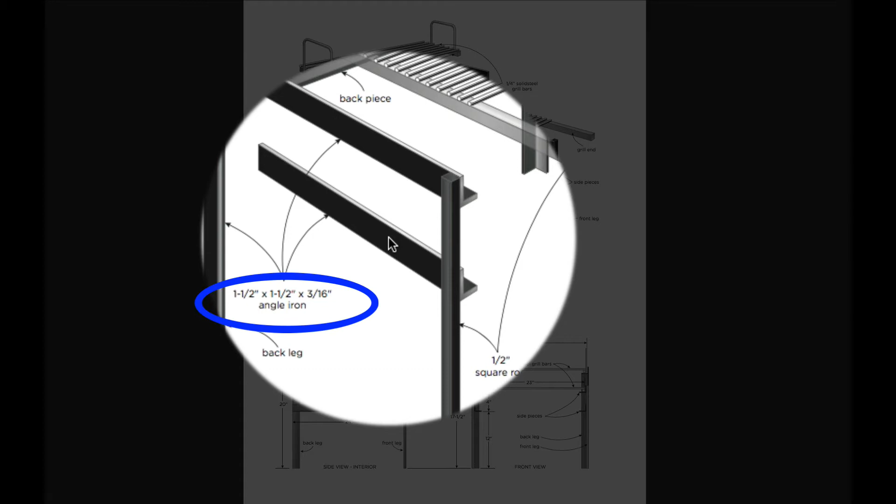details on the plans. Your construction work will go better if you print out the plans and keep them handy in your shop for reference. And looking at them now, you can see that the majority of the support structure is made by 1.5 inch by 1.5 inch by 3/16 angle iron. That 3/16 business refers to the thickness of the two sides that come together. So it's fairly thick angle iron.

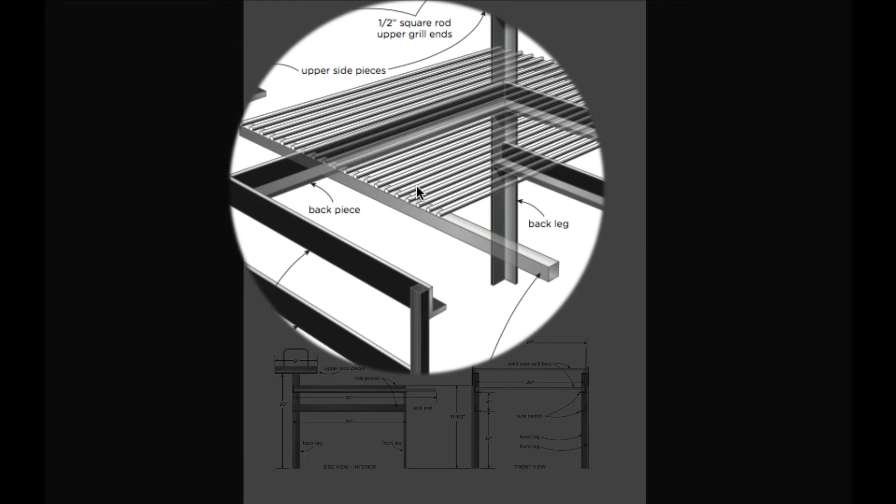The front legs, 1/2 inch square solid rod. That's the same thing that's used for the grill end components, the components that hold together the 1/4 inch diameter solid steel rods that form the actual grill surface. Up here, we've got the same material used to make the handles for lifting the warming rack off. 1/4 inch is small enough that you can bend that around something without heating it necessarily. It's not a big deal to bend that kind of steel before you weld it on to these upper grill ends.

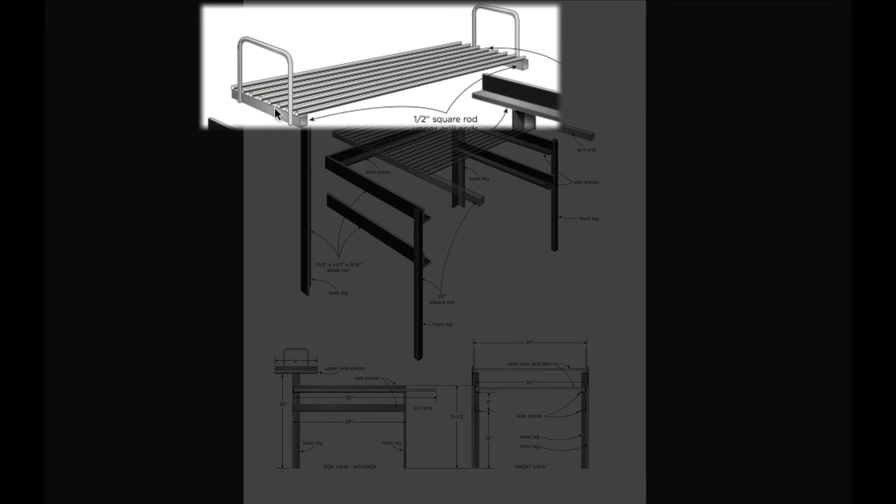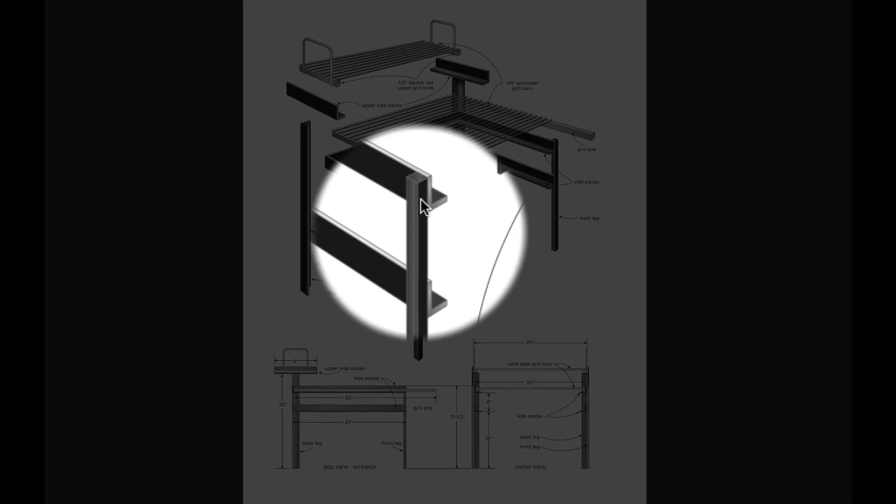When it comes to these side pieces here, and here, as well as the back pieces, there's something I need to mention. The front is no problem. It's just a square cut front flush with the front legs. But because the back piece here, that you can see, meets the side pieces here, you are going to need to cut this at a 45-degree angle so they can come together properly.

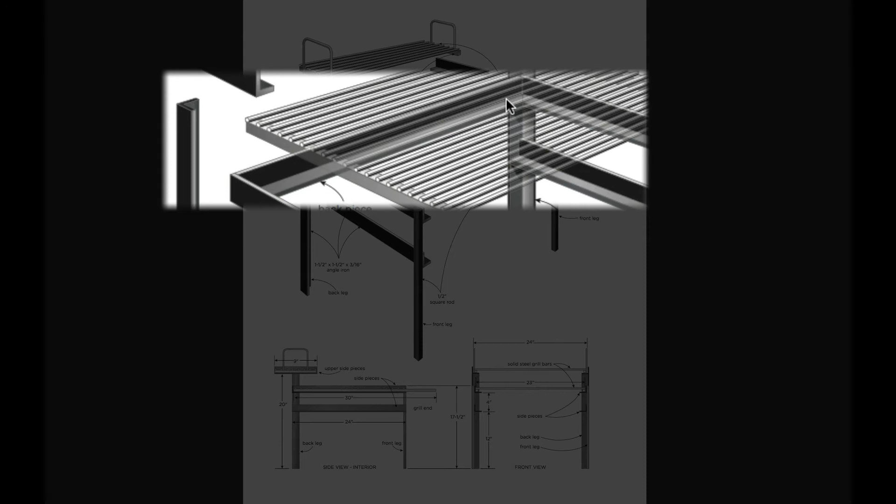Without that, the bottom flange of one piece of angle iron is going to interfere with another, but it's easy enough to make a 45-degree cut here. It doesn't have to be super accurate. I mean, the more accurate, the better, of course, but it's not a hugely crucial thing. It's just more or less about creating clearance so the parts can come together properly within this back leg.

I'd like to leave you with one other tip in this video, and it has to do with efficiently creating this grill with nice even spaces between. You can spend a lot of time measuring and marking for the different grill bars, and it probably still won't work out all that accurately because a little bit of error is going to look kind of bad. It's going to show up quite a bit visually.

So what I recommend is that you start by welding the back bar on, and you make that square to the grill ends here. But then you find some kind of a piece of metal that's the right width for the spacing that you want between the grill bars. So it's not crucial. It can be 1/2 inch, 5/8 of an inch, even 3/4 if you want. But if you've got a strip of steel, it doesn't really matter what it is, as long as it's long enough to rest up against that first bar that you've welded down. So it acts as a kind of a spacer.

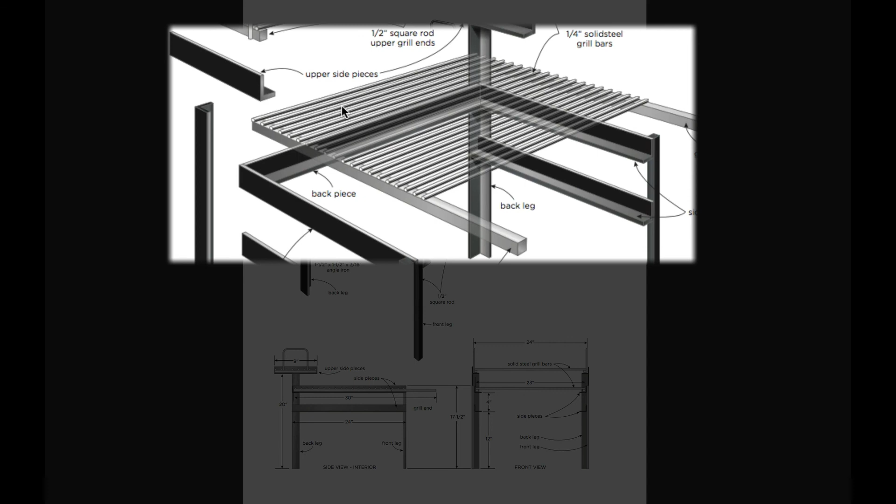You have your spacer piece tight to the first bar, and then you put your second bar in tight to the spacer, and then you tack weld it here and here, and then you hopscotch your spacer over to the next one, and then you put in the third grill bar, and you just keep going like that. So that'll be much faster than measuring. And as long as you're working carefully, you will have perfectly parallel grill bars that are going to look great.